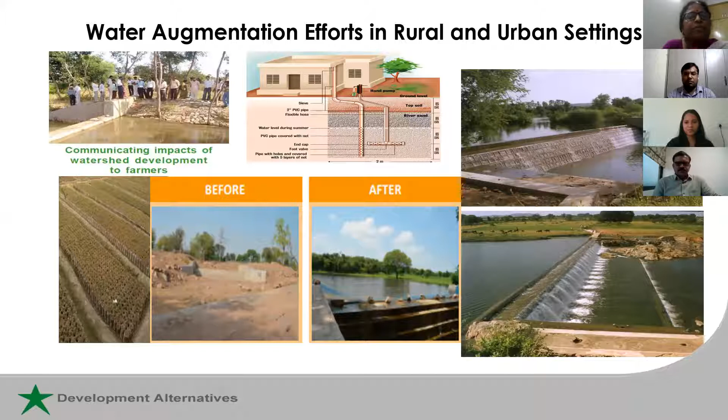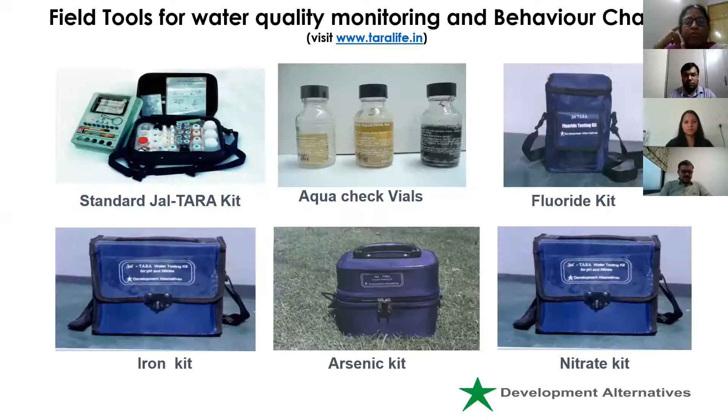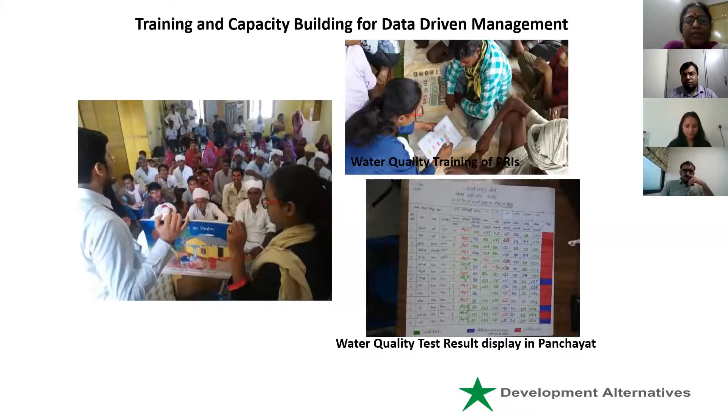The next one, yeah. So while you have these tools, which will help the citizen not only to understand the water quality, but also understand the performance of the filters that they are using, the before and after, and also take decisions. And these pictures show we also train farmers locally on how to do water efficient farming practices. And we help them participate in the micro planning process in the panchayat, and provide data, both in terms of how much water is there, what is the quality, and those kinds of parameters. We ensure that the local panchayats get this data at the panchayat ghar, and may be able to start influencing the panchayat decision making processes.

So with these initiatives, what we thought was for that kind of a transformation, and worldwide now everybody is realizing that in any of the efforts that government or citizens or a large number of funding agencies are doing, unless we engage the citizens, water management is not going to happen, and we need to understand all dimensions of water. So a large amount of knowledge sharing is important. So these webinars are designed to build capacity and inculcate positive behavior among citizens, the tools and techniques for that, and also training a large number of youth and communities to adopt new tools as they are listening.

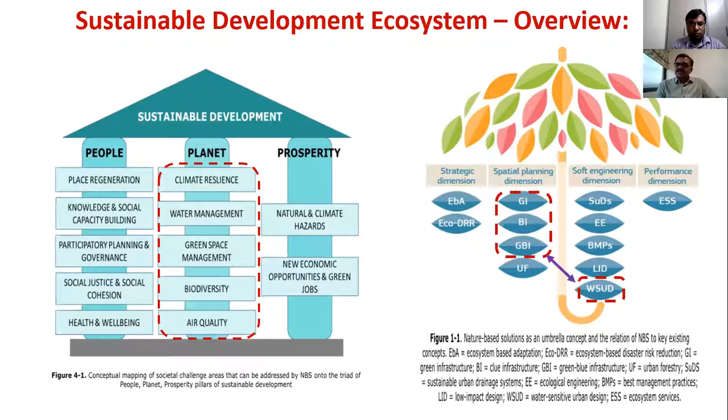And there are some solutions from planning point of view, which are highlighted on the right-hand side, called GI, green infrastructure, BI, blue infrastructure, and green and blue combination, and urban forestry. All these concepts put together under a soft engineering dimension. Basically, there are engineering dimensions like construction of dams, construction of canals, but there are some in situ water augmentation measures that come under a soft engineering dimension called water sensitive design and planning. So this would be the overview of my approach and concept.

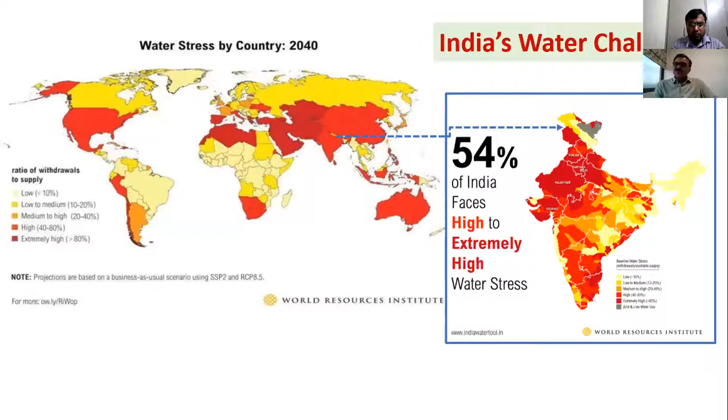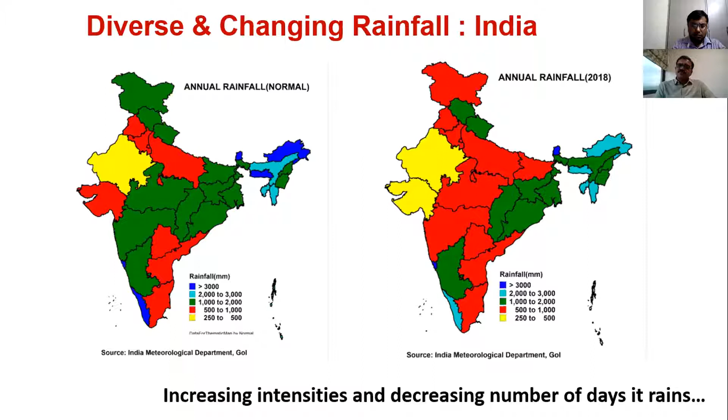If we really see India, India has slid into the water stressed category in terms of the global indicators. Per capita water availability has come down from around 6,000 cubic meter per person to around 1,500 cubic meter per person, which is an alarming situation. And we also see on the other side that there is an increasing intensity of rainfall and decreasing number of days it rains. This is creating immense changes in the water cycle, and the way the human settlements have to adjust. Increasingly, if you see in last 5 to 10 years, not only in India, across the world, cities, human settlements are reporting flooding, as well as groundwater decline, as well as water shortage.

And India is a very rich, diverse hydrogeological setup. So with these kind of diverse hydrological setups, whether we need to have one single type of approach, or we need multiple decentralized approaches, and within the decentralized zones further decentralize into different scales. I think that would be my talk, and I would say that India is a very rich, diverse country from hydrogeological point of view, and the solutions also need to be from different context, site specific.

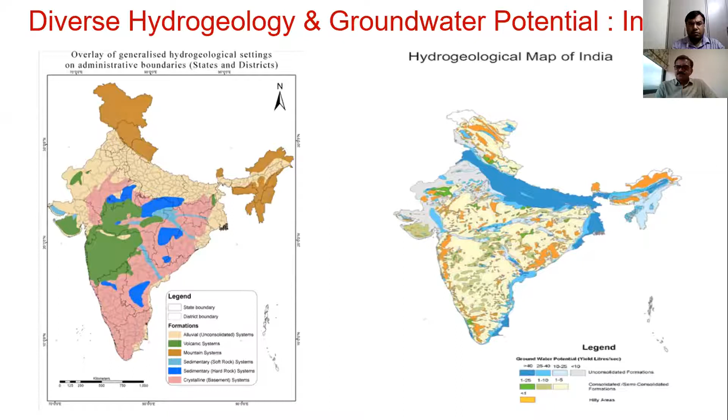But just to bring you these facts which I've talked about, per capita water availability reduced, all the highest levels of decision making are making a call saying increasingly cities will run out of water, rural villages need water for all. There are big missions coming up to provide water, but on the other side, cities are being told that 21 cities will run out of groundwater. So this is the emerging scenario, and considerable human settlements depend upon groundwater as a source of water supply.

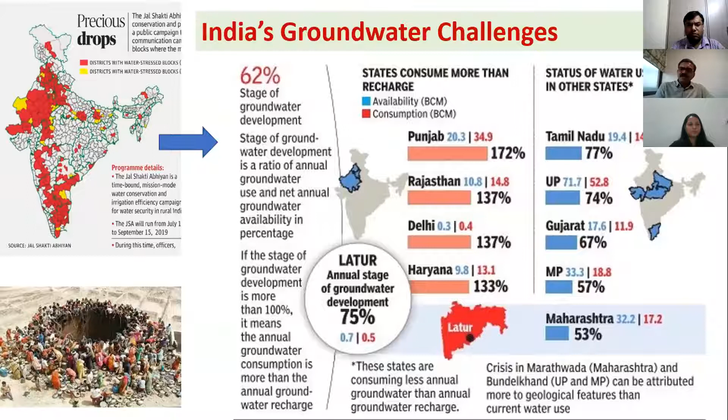Whatever you may say, we have constructed big dams, canals, but considerable population depends upon groundwater, and over extraction of groundwater takes place, and this source is underestimated and unaccounted, because the domain of water provision is dominated by civil and mechanical engineers, and there is dominance of hardware and big is beautiful projects.

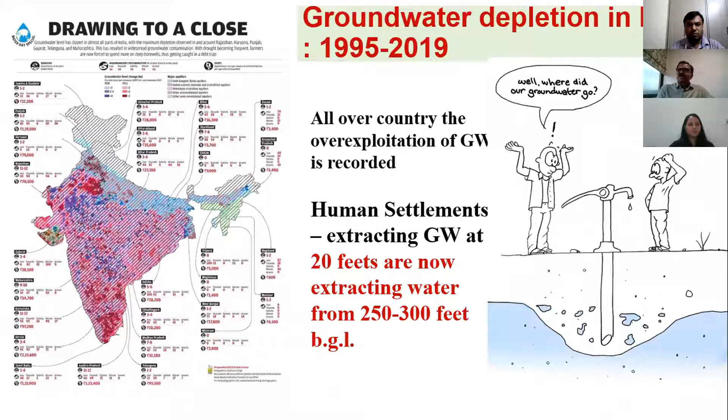So the emerging scenario across the country is that we are over exploiting the aquifer beyond sustainable limits, and we basically don't know where the groundwater is going. Groundwater is actually fueling our development. Development maybe in agriculture sector, industrial sector, or even cities. So today, cities are growing rapidly, both planned and unplanned, but nobody knows from where all this water comes for your construction activities and likewise.

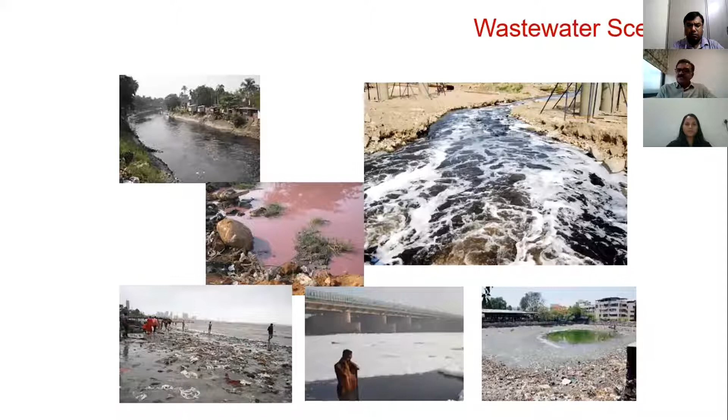And another thing which is emerging on the other side is the flooding problem. One side we have the shortage of water, groundwater declining, and this flooding which is common from different parts of the country. And increasingly this also happens across rural areas. And people struggle to find solutions which work in rural and urban areas, as well as how to adapt to these changing uncertain climates which are emerging.

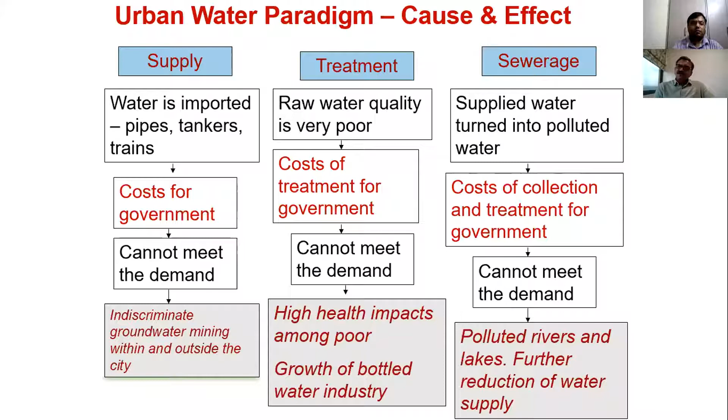So we have mapped these kind of issues, and we have found that there is an indiscriminate groundwater mining, high health impacts, growth of bottled water industry, polluted rivers, and these all analysis have been done over 3 decades of journey of CSE's water program, trying to understand why it happened. We see that India still, when I was in school, I was taught that India is agricultural economy, Krishi Pradhan Desh in Hindi we call it. Today also it's the same. Around 65 to 70% of the economy is rural.

But then in the rapid urbanization, what is happening is we have large number of urban centers. We have 8,000 urban centers where people are rushing from rural areas. There is a competing demand of water between agriculture, industry, and domestic water requirements and city water requirements. So cities are growing at the cost of rural areas. So that's why I would say my presentation is not just related to urban, but urban is related to rural, because it pulls all the resources to grow from the rural catchments. So everything gets destabilized in terms of water and sanitation if this kind of rapid unplanned urbanization takes place.

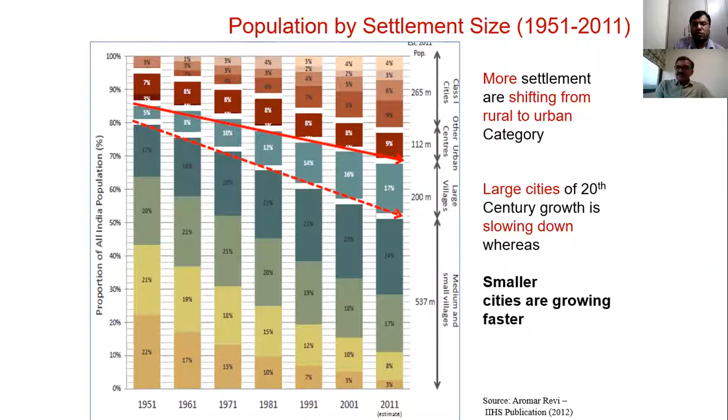Few analysis based on the census 2011 data, but things have changed because in 10 years the situation has also changed. But yes, the patterns are same, that more settlements are shifting from rural to urban. Large cities of 20th century growth is slowing down, but smaller cities are growing faster. Like a smaller city of 1 lakh population will become 2 lakh, but a metropolis city will not double in terms of population. That's the kind of difference which is happening. Small and medium cities grow double, but they don't have the governance, they don't have services, they don't have networks.

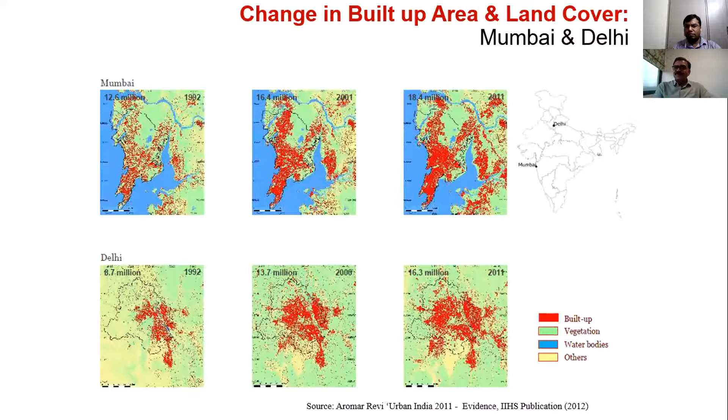But these all facts are basically shown in this kind of few images I'll show you. That will also give me a chance to skip the few number of slides, which I think Siddharth was cautioning me, sir, you have too many slides.

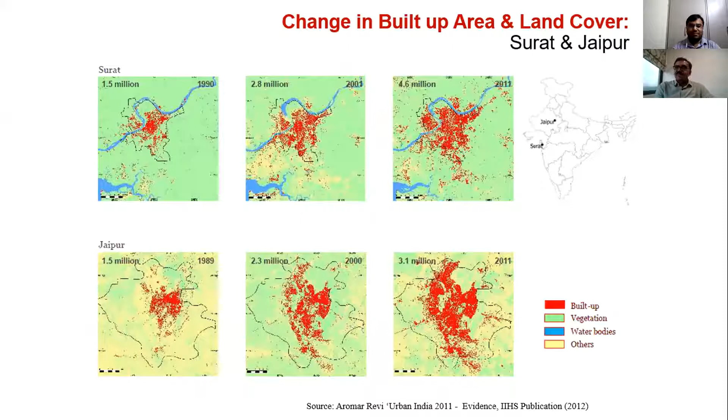So I would just say that these are the pictures which will show you the urban spread of the cities across the country. These red color expanding over years is basically the urban growth or the built growth which happens in the rural areas, and then we bring resources for sustaining urban development from outside. And what is interesting is the pre and post development. So when there is a natural area, open area, you have a pre-development, which the sketch clearly shows, and then there is a post-development where you have built up households or establishments.

You result in concretization of the surface, and you change the runoff, and you disrupt the hydrological cycle. And the runoff has less time and space to percolate, and it flows down, rushes towards the lowest point in topography, which is river, lake, or sea.

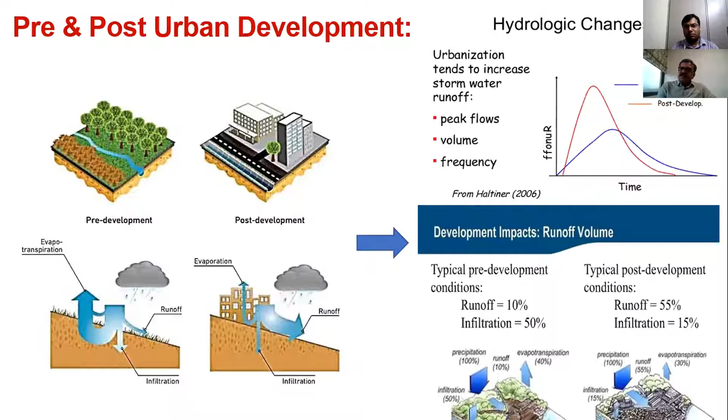So this is the pre and post development scenario when a natural area is developed, and these things are reflected in a bad form. What we have done is what we see every day in every city nowadays and every built environment. Flooding is becoming very common. I'm just showing these pictures to show that everybody knows that this is happening, but these numbers are striking, and they're alarming. Less infiltration, huge concretization, flooding in urban and rural environments.

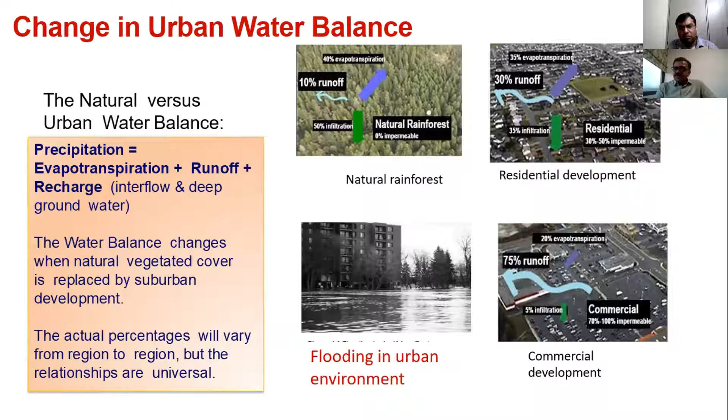But was it so in the past? No, I think not. We see these examples and good model projects in rural areas. Similarly, Development Alternatives has worked in the Bundelkhand region, and in Rajasthan some good work has happened. You would revive degraded land and a degraded environment, and you will grow 3 crops there with water harvesting and all that. This is a leapfrog to prosperity in rural areas. And this has also been the practice, a very disciplined lifestyle in rural areas.

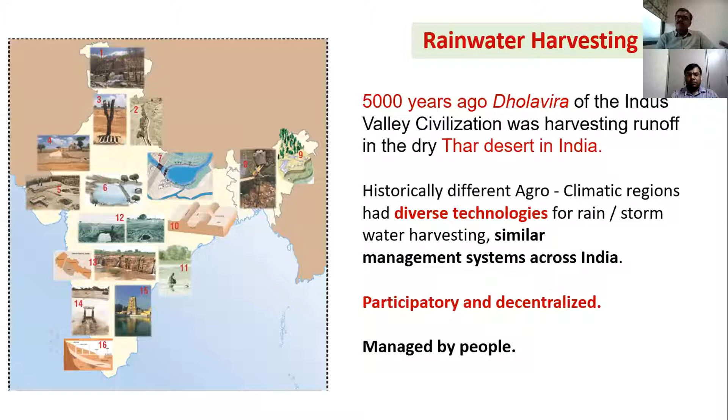Historically, 5,000 years ago, India used to harvest rainwater, with diverse technologies and participatory and decentralized approaches managed by people. Different agroclimatic regions, from desert to the highest rainfall area in the world, coastal areas and hilly areas. Everywhere we have different technologies. People were involved and they were managing water. And this was an integral part of the web of life. Deep knowledge of water and elements, and there was a rich diversity and a social discipline.

But as we urbanize, the most literate and most educated society, we also lose social discipline somewhere, I think. And historically, there is enough evidence saying water was not a free good. But today we want water as a free good. So analysis by CSE shows that there's a decline of traditional water harvesting systems. The community's role is reduced to zero. We are just reduced to being a subscriber. Bureaucracy and institutions have been introduced, and big, beautiful, centralized approaches are dominating.

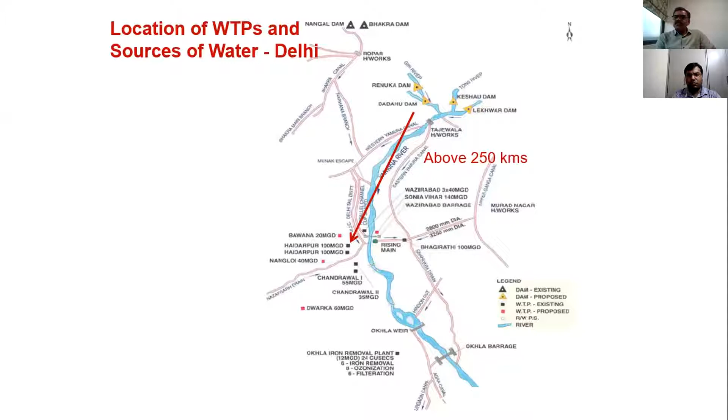We have analyzed different sized towns across the country, big and small, to understand both water and sanitation issues. And this book, released around 10 years ago, Mapping Water and Sanitation Issues, basically shows that when a village becomes a town and a town becomes a big city, we try to source water from outside because engineers dominate the world of water supply, design, and planning. We bring water from far away. For example, Delhi, 250 kilometers. Chennai, 100 kilometers. Mumbai, 100 kilometers. Hyderabad, 100 kilometers. Rajkot, 75 kilometers. Jaipur, 120 kilometers. Jodhpur, 200 kilometers.

And this is all a result of a technical standard and norm in the Ministry of Housing and Urban Affairs: whether you are located in Jaisalmer or in Cherrapunji, which has the world's highest rainfall, you need to provide water to all, 150 liters per capita per day if you plan to provide a sewerage system. And if you don't plan to have a sewerage system, then a city can be provided 70 liters. That's the requirement for a human settlement, that's what is being told.

That means from 70 to 150, the remaining water is being brought from faraway places only to flush toilets, actually. And it is not even treatment. A sewerage system is only a conveyance system, taking water from one place to another. Treatment is a separate ball game, which itself is a costly process. So first, you bring a huge amount of water in the name of urbanization or quality of life.

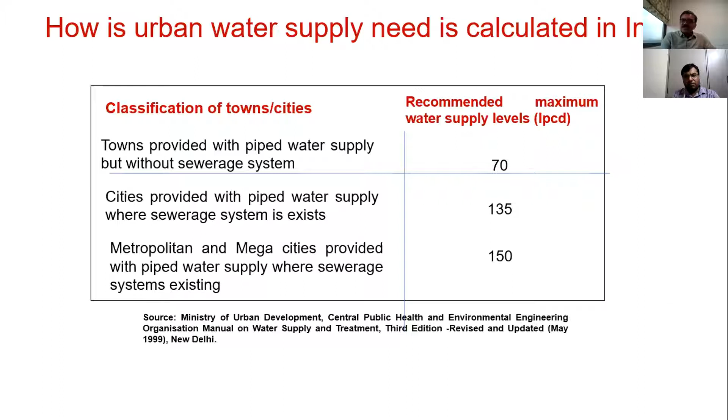On the other side, we also see that bigger cities had bigger leakage or transfer losses, as high as 34%.

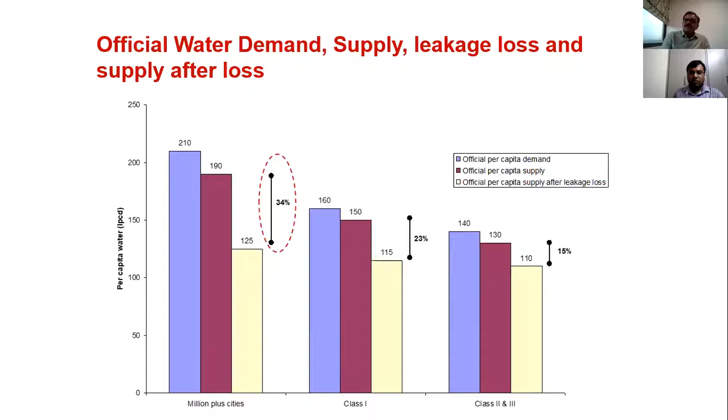But smaller cities where the supply was decentralized and there was dependence on groundwater did not have that much distribution losses or leakage losses. So there was something to do with technology, that we did not choose the right technology, because centralized, like for example Delhi, 55, 60 kilometers water has to travel. Then we don't have the resources to fix the leakages. The distribution losses are there.

So there is a huge amount of leakage loss, and we thought that slums were taking away water. No, slums do not have the capacity to even store the water. Actually, they might lose some. They store the water in buckets, maybe 1 bucket, 2 buckets, or 3 buckets. The water was being used in big, rich, high income areas, and water was being used in showers, washing machines, and flushing toilets. That is where the water was being lost.

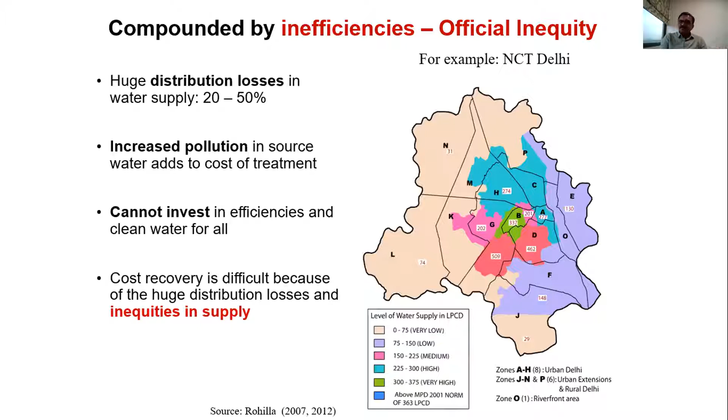So we see that in all the outside areas where the network was not there, municipal water supply was very low, but in the core, it was very high. The core was supplied with the pipe network, but all remaining human settlements were depending on groundwater. So these maps clearly show there is an inequity in the water supply. There is a lot of problem with the paradigm that you bring more and more water, invest into the supply system, more wastewater is generated, and more cost of treatment for producing good quality water as well as sewage treatment, and that is all unsustainable.

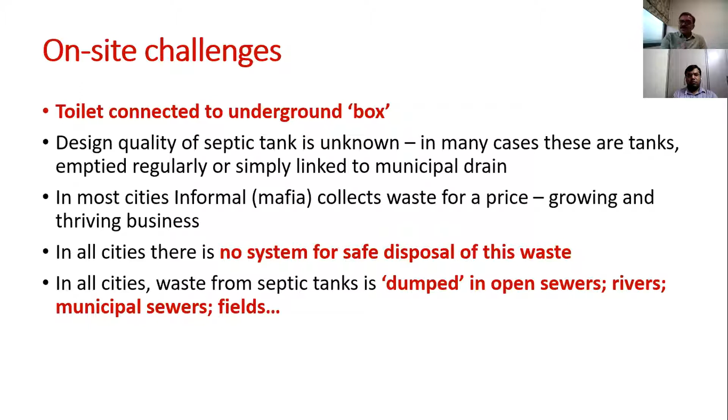On the other hand, till date, in the national capital Delhi, as well as across the country, I can say there is a 35 to 40% dependence on on-site sanitation. With the new toilets, with India being declared ODF, there is a huge dependence on on-site systems, but nobody knows where the waste of these septic tanks goes. It ends up in rivers, lakes, and plots. So that connection is missing. So we have these kinds of scenarios.

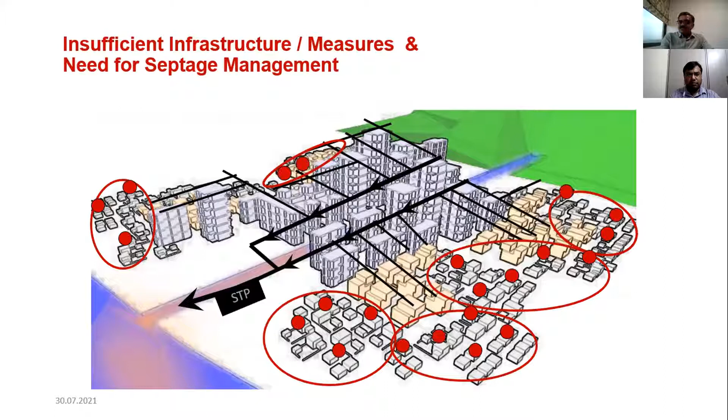If you really see the 3D dimension of the city, these are the pockets which are unserved. There is no water, there is no sanitation. We are making pipe dreams and we are setting up sewerage plants, but there is no treatment going to happen. These pockets remain outside the purview of planners. So what is missing is the toilet, sewerage, and the fecal sludge, where ultimately nobody knows where the waste goes, and the end result is pollution.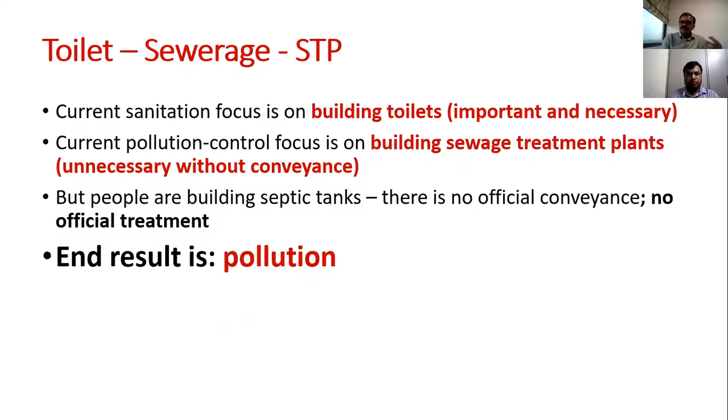So if you look at the SDG, it says access to water and sanitation. I'm coming back to the global agenda, and this topic says sustainable. These challenges are that there is competing demand. Then we also need to say that there is increasing risk to businesses, governments, communities, and environment. Now, clean water and sanitation needs to address all these things. And if we really want to talk about sustainability, then we should think in terms of what it takes first to supply water, generate wastewater, and then talk about its treatment, energy required, and emissions.

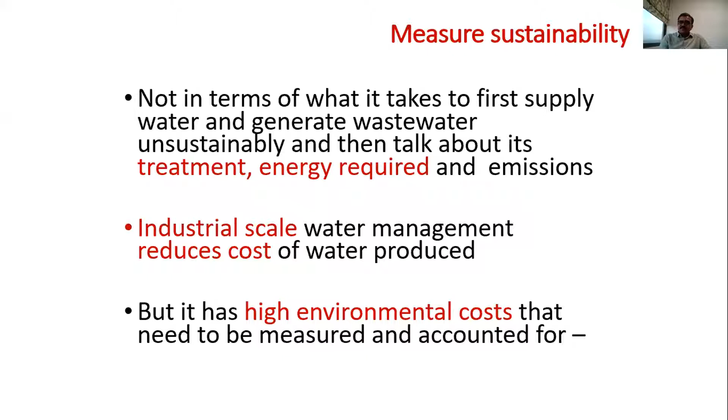Industrial scale water management reduces the cost of water produced, no doubt, but it has a high environmental cost that needs to be measured and accounted for. But nobody is talking about that. So decentralized water and wastewater systems, why do they lack productivity? Or is it because we don't even know how to value what is low input as well as low output? Centralized modern wastewater system is expensive, but it is also highly subsidized. People are not talking about that. People are talking that it can be the solution.

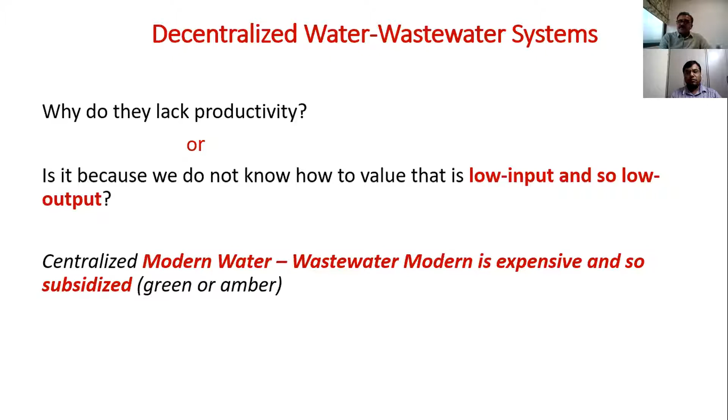So these are the issues when we look at the SDG goals: can we provide a sustainable and affordable solution for all? No, this is about a different model of growth where we are talking about SDG. We are talking about putting the last person first. We are talking about values. How do we value the knowledge of each person? Value the frugality and the rationality.

How do we become more prudent? Our evaluation or solutions, what we provide for water and sanitation, should capture these things of the communities and people when we develop the solutions, such that we are more adaptive to the shocks which we get from uncertain climate and other situations which are developing.

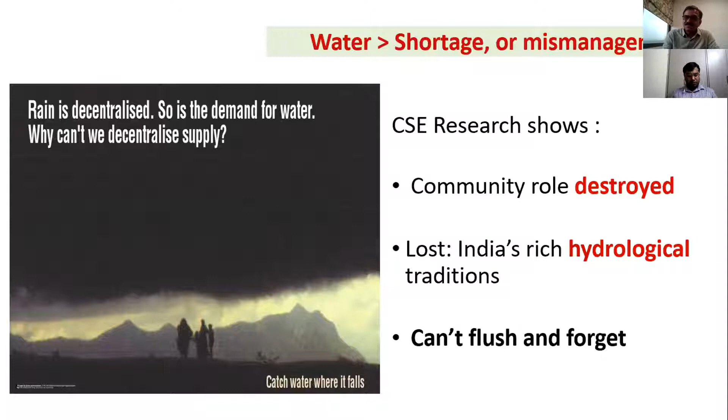So all this journey of CSE, from dying wisdom to pushing for making water everybody's business, we have been talking about solutions now. What do we do? Community role is destroyed, hydrological cycle is disrupted, and there is a paradigm of flush and forget. We are bringing water from faraway places. Even now, with ODF being declared, even villages will have flush toilets. With Jal Jeevan Mission, everybody will have piped water supply. People will talk about flush and forget. So now what do we do?

I think there is a challenge of basically the policy and the practice. There has to be innovation. And also we need to move very fast. The challenge of the scale of the change which we need to adapt. And the challenge of capacity. Do we have people? Do we have practitioners who can think about these more holistic and integrated solutions?

CSE has been investing the last decade or so because we need to move fast. In the past we talked about, at the individual household level, you can do rooftop water harvesting and all those things. And we have promoted this at the highest level, like the President of India also going for rainwater harvesting in his residential building. We have also promoted these tools where individuals are made responsible to store water, capture water. We have also pushed that individual harvesters are recognized, and there has been a movement.

However, we have also reviewed our policy and program. We find that the changes need to happen somewhere else. There are macro and decentralized level possibilities which are the missed opportunities. CSE has been working on how at different scales we can harvest water, how we can treat wastewater and reuse water. All these things combined together form what we call water sensitive design and planning. These are a combination of decentralized water and wastewater management technologies. And we are trying to connect with the real users and implementers and experiment and scale this up.

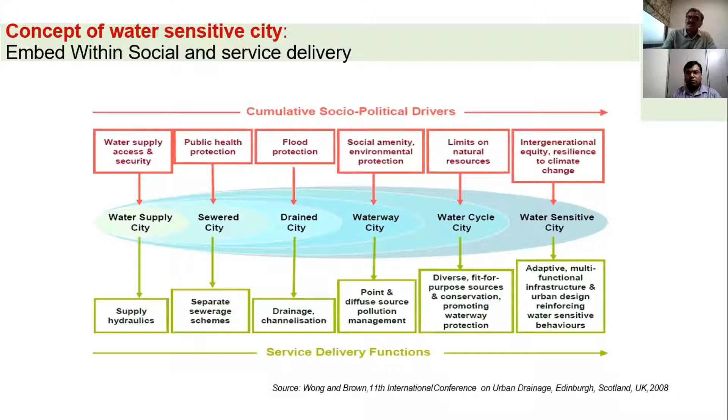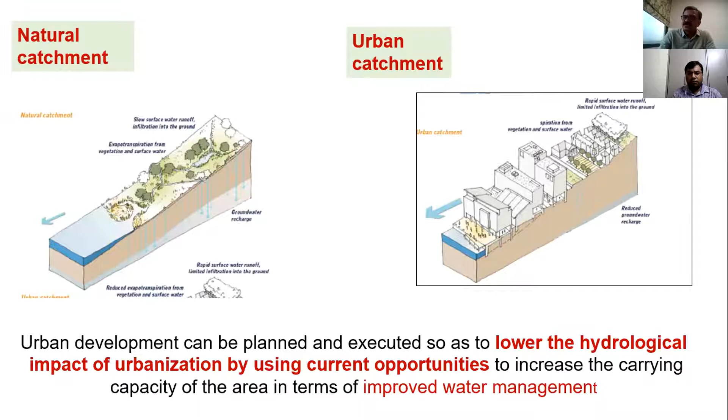So these are the big questions, and CSE has developed this program so that we can organize our built environment, rural or urban, in a way that you can lower the hydrological impact of urbanization by using current opportunities which already exist. So I will show you how. I will focus more on water. Sanitation, I will only touch upon. We say that as you develop the built environment, you should delay, store, and only talk about draining as the last option. We should not pave, pipe, and pump.

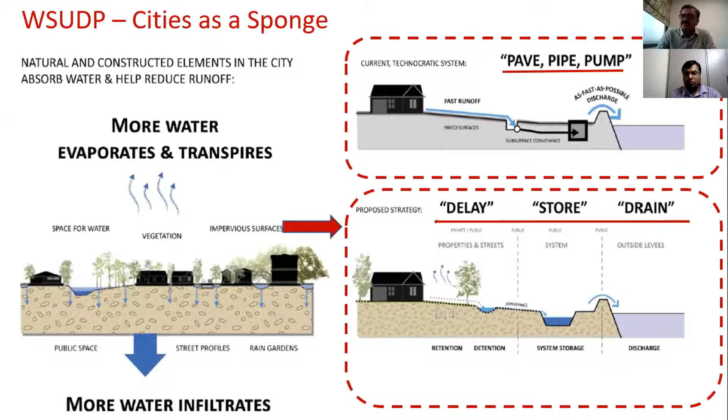In this process of pave, pipe, and pump, we lose a natural resource which is readily available to us. And we have developed this approach of water sensitive design and planning, which talks about making institutions responsible for water management, where they have reduced the role of individuals, that they should be made responsible for protection, but with people. The citizens should be involved in lake restoration, pond restoration, wetlands monitoring, and other things. We should also talk about water conservation measures, like water efficient fixtures, similar to less electricity consuming fixtures.

Like you should have a shower which consumes less water. You should have a flushing system which consumes less water, which should be promoted, such that we reduce the problem at the beginning itself, rather than saying later on that we don't have resources to treat the sewage when the flushing water has mixed with the human excreta.

And we also talk about that if you have demand of non-potable water within your neighborhood, why do you first take your sewage outside 50 kilometers away from the city and then bring it back for reuse? You should think of local decentralized wastewater treatment for local non-potable water requirements.

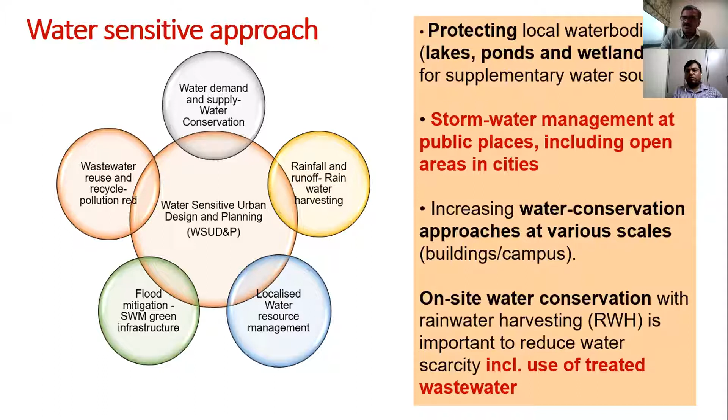So we have combined these ideas, and we have said that earlier we used to focus on individual household level interventions, where we used to say do rainwater harvesting, rooftop water harvesting. No, that is not sufficient. That will only capture 5% of the total runoff or rainfall, but it is at the neighborhood level where there is a huge potential. At city level and regional level, huge opportunities exist.

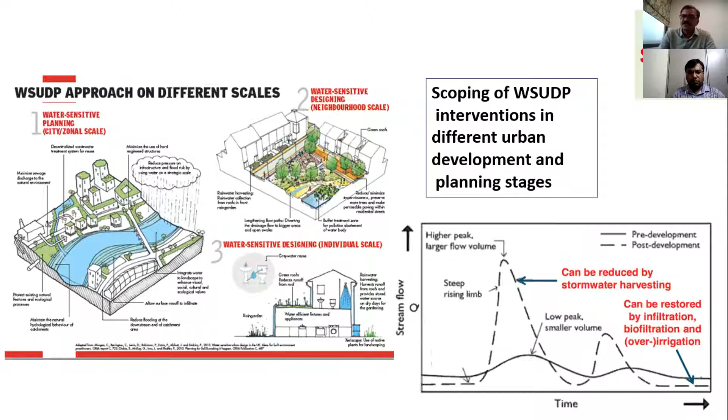And we have done these calculations, which clearly show that if we really can explore all these combinations together, then you can have in situ water augmentation. First you explore these opportunities, then only think of bringing water from faraway dams and distant transfer. First you should explore these possibilities.

So CSE has reviewed the master plans of different sized cities across the country, and we have found that there are abundant open spaces, contrary to what is being said, that where is there an open space in this built up area. We have found that huge amounts of open spaces exist, and we have also cross-checked on the ground. These are as high as 60-70% spaces, under semi-public, public use, commercial spaces, residential spaces.

Those spaces, with innovation in design and practice, can be used for in situ water augmentation. And I will show you with examples how this can be done. So all this data is from the master plans, which we have analyzed for 70, 80 different size towns. Two things have been done.

For example, Delhi. Delhi is an example where we have said that if we really use the open spaces, like Delhi has 16,000 parks and huge area under open area, then 40 to 50% of the current demand supply gap can be met by harvesting the stormwater runoff.

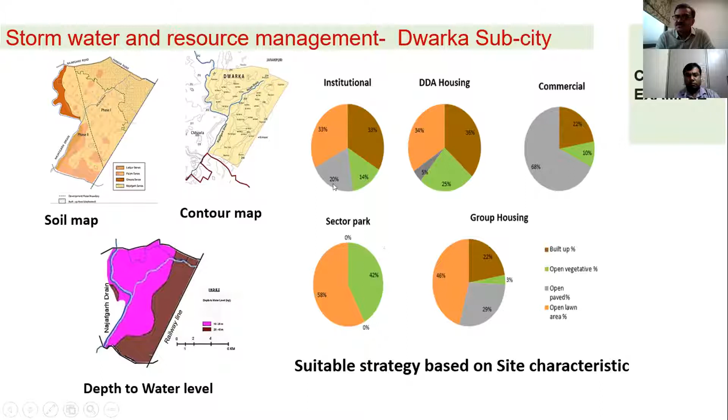We have studied Dwarka city, which has 30% area which is unauthorized, this part. And we have this planned area, Phase 1 and Phase 2. We have studied the institutional, DDA housing, commercial, group housing sector areas. We have mapped the built up area, which is the dark brown color. We have seen the open spaces, you will see the gray color, this 68%, 29%, 20%. These are all the open spaces available, a huge amount of it.

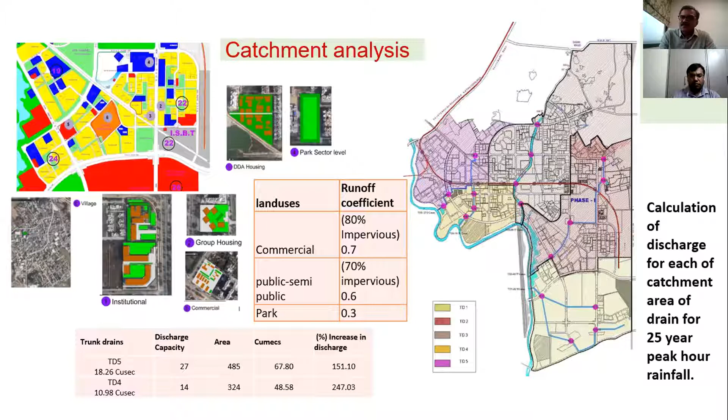And we have gone to the sector level and tried to understand where there are open and pervious spaces available. We have done calculation of the rainfall, the runoff, and the potential of runoff capturing. So these are all detailed studies on the ground which have been done.

We have also identified opportunities where in these areas detention ponds, bioretention areas, gully trenches, check dams, filter dams, and swales can be done to moderate the stormwater. And we have found that 5 to 15% of the open space area of each catchment can retain 100% of the 1 hour peak discharge from the watershed for a 25-year storm. So these kinds of detailed studies have been done.

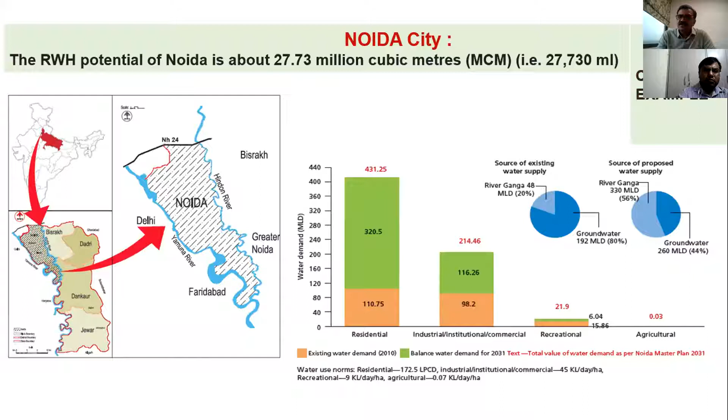We have done this study for Noida also, where for the entire city, we have identified in each sector of Noida, which also has urban villages and high density developments, that you can bring a reduction in water demand by 26% if we fully harvest the rainwater harvesting potential in Noida itself.

However, at the moment they are dependent on groundwater, but they plan instead to bring water from the Ganga River, from faraway transfer, as the paradigm is like that. But we have done a detailed study and we have submitted this report to Noida Authority.

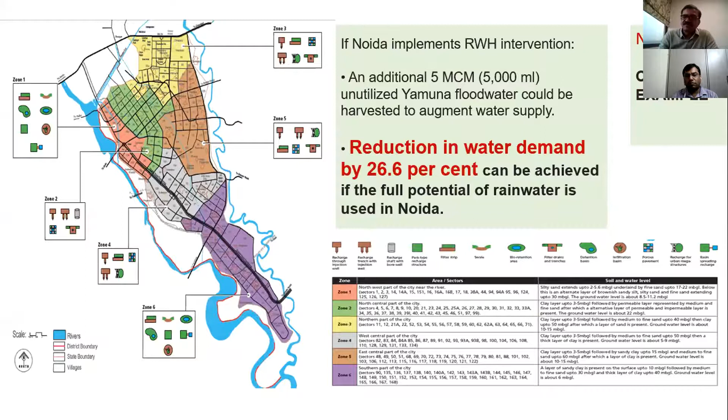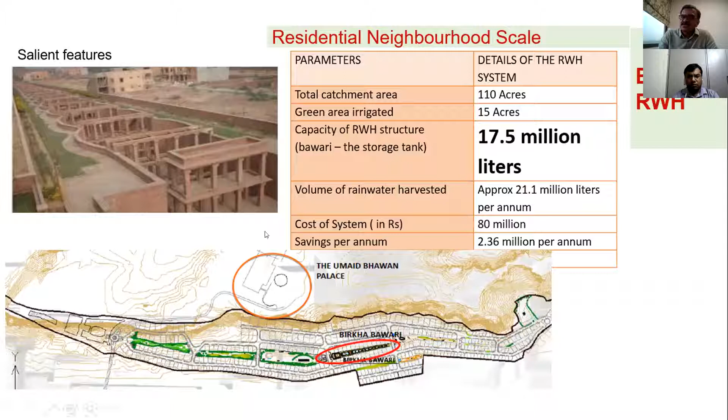We have also studied examples done by the private sector, like in Jodhpur, where this architect has designed a residential plotted area, premium flats, crore rupee properties, with step well type designs to harvest rainwater. So they are harvesting 21.1 million liters of runoff and doing rainwater harvesting in Jodhpur.

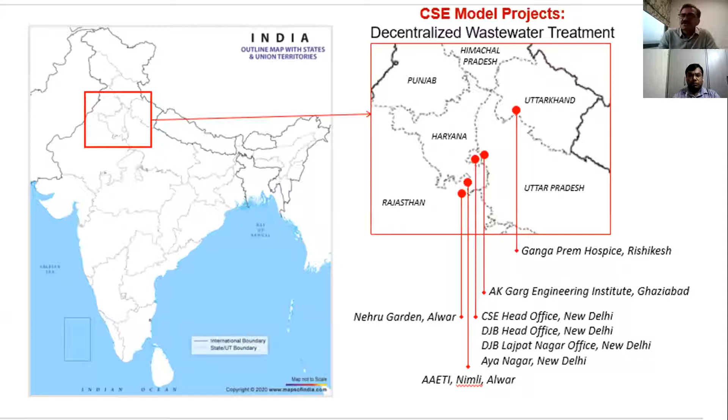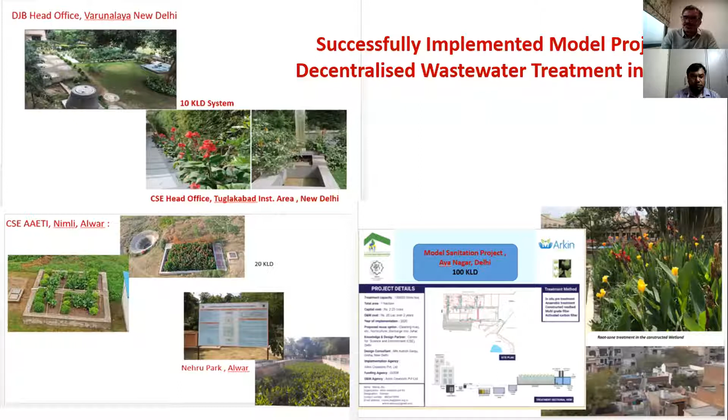Similarly, we have also done some wastewater treatment projects, which CSE is using as high visibility, high impact projects across the country. These projects look like this, they go along in your neighborhood in the landscape, where you treat your sewage and reuse it for horticultural water requirements. These are a few examples. The Delhi Jal Board headquarters itself is using wastewater for non-potable water requirements. So these are some examples which I wanted to show, that this is happening, and this idea and approach we have pushed to the implementation level.

We have done a detailed study for use of parks and open spaces in Odisha. Odisha state is the first state in the country to issue the advisory on water sensitive design and planning. They have done around 10,000 structures in 75 days. We have also issued the roadmap for use of open spaces in Delhi. And in yesterday's newspaper, I was reading that in Dwarka, which was the case study I've used, the first park has been developed for harvesting stormwater.

So, as I said, there are 16,000 parks, and this is the government data, it's not my data. Every park can store, recharge, augment in situ water resources at a low cost. And only if there is a deficit of water, then you think of bringing water from outside. So these are some of the updates which I'm showing you. These are the breakup of those 16,000 parks which I was talking about. If anybody is interested, South Delhi has 6,800 parks. And starting from a city level, Delhi still has 165 villages, you can imagine. So we have done this study and we have said that 3,423 million liters of water is the missed potential, which we can augment by capturing the stormwater runoff.

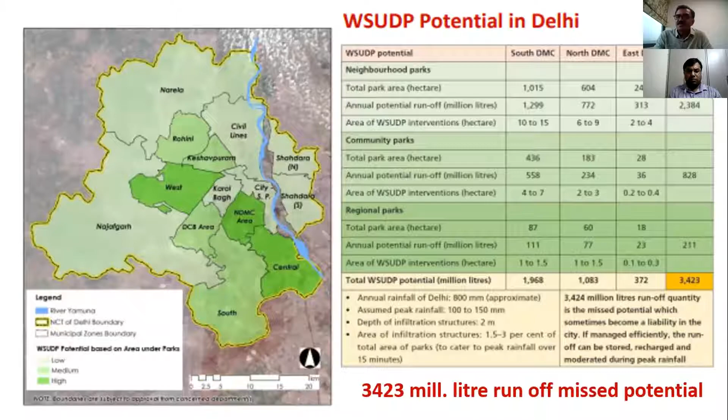We have done these detailed parks in South Delhi: Saket Park, Park along Ring Road, Neighborhood Park in Greater Kailash. We have done detailed studies. We have also recommended structures, what can be designed where. And by using just 1 to 3% of the area of the park, you can capture this kind of runoff and augment your resources in the neighborhood. So you can see the quantum, the numbers, as well as the physical landscape improvement.

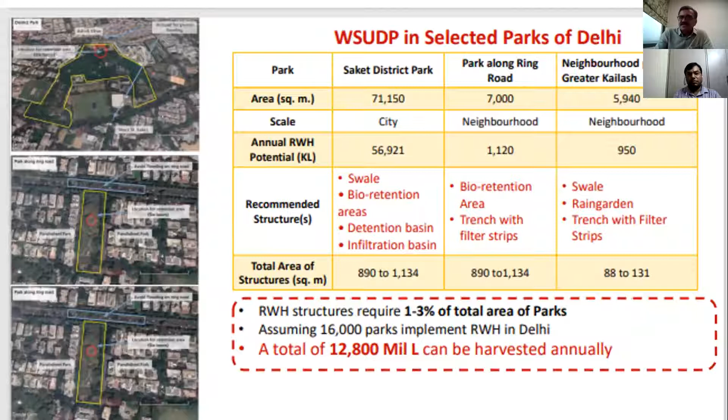These spaces are all blue-green spaces. So the blue-green spaces actually become the blue-green infrastructure. And so you actually mimic the water cycle. That's what I call a nature-based solution. So we are not talking about highly engineered solutions. We are talking about basically nature-based solutions. And I'm happy to announce that this idea has been picked up by government also.

Day before yesterday, on 27th July, CSE with National Mission for Clean Ganga launched a program covering 35-40% of India's area, where 2,000 urban centers are being targeted for making them water-sensitive cities. The key focus areas of this program are to push for water efficiency and conservation, decentralized wastewater treatment for local reuse, urban groundwater management, and urban lake management. Basically, if we do these, then we will not be pulling resources from rural areas, peri-urban areas, or faraway places to meet the demand for water here. So rural people will have their own local site-specific solution. We will only bring the deficit water.

And all these projects which I'm talking about, as well as international best practices, have been documented in a web compendium which CSE has launched for achieving success at scale. So this is a compendium of green infrastructure systems. This gives you case studies across the world and India, the latest of what is happening in India as well as abroad. These case studies can be searched from the water body point of view, parks and open spaces, residential, institutional, and the type of intervention, whether it is a policy intervention, plan intervention, project, or who owns these interventions. This keeps on updating every month. The numbers keep on updating.